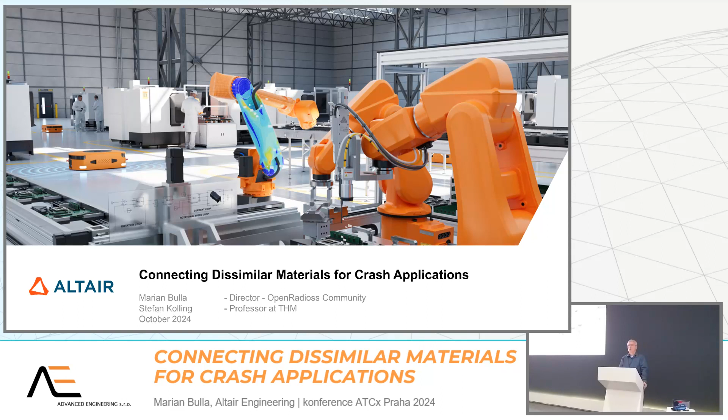We will touch again materials, because dissimilar materials means different materials, not only steel, failure criteria, connection elements, connection modeling techniques, reality versus virtual world, which means simulation in Radioss and OpenRadioss, contact interfaces and so on, failure of contact interfaces, cohesive zone elements, so all this beautiful nonlinear stuff, which you can imagine, we will talk a little bit about.

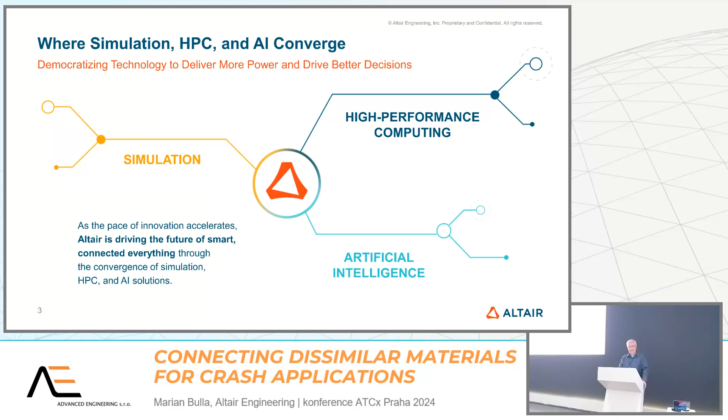So our vision at Altair is computational intelligence will drive innovation for a more connected, safe and sustainable future. So this is what we want to now democratize, and what we did with HyperMesh, which you saw before, but also with Radioss, OptiStruct, implicit solvers, and explicit. And even with Radioss, you have the commercial version as well as the open sourced version, which you can use for free without any license fees. You can even see in the source code how Radioss is coded. I will come to these points in a few minutes.

Okay, let's get started. First, a little bit theory, the implicit part, which is, for example, OptiStruct, Nastran, and so on. All the implicit solvers are working in this way, and this is the heart of it, where the stiffness matrix times the deformation is equal to the external forces. Once you reach this equilibrium, you are fine, and you will have your global solution. For implicit, if you are lucky in one step, you will get the convergence, equilibrium, everything is global, solution, perfect.

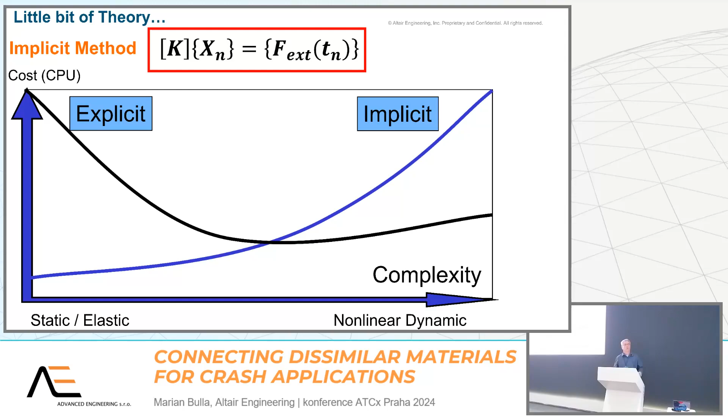Anyway, the world today is not black and white like this, so it's kind of this. The implicit solutions you can use here. If you are in static, elastic load cases, implicit is perfect. Plasticity, slightly, buckling, even less. If the velocity and dynamics are increasing, it will become more and more difficult to use the implicit solvers. We're switching to explicit solutions.

For sure, times are changing and solvers are evolving. So now it's not black and white anymore. We have an intersection area where it is not so easy to distinguish what kind of solution should be used. Therefore, both solvers are now evolving. The implicit solver like OptiStruct is getting more and more features of the explicit solver. So you can even now do drop tests with OptiStruct. Whereas explicit is also going to this region where it is usually very costly to do static simulations for an explicit solver.

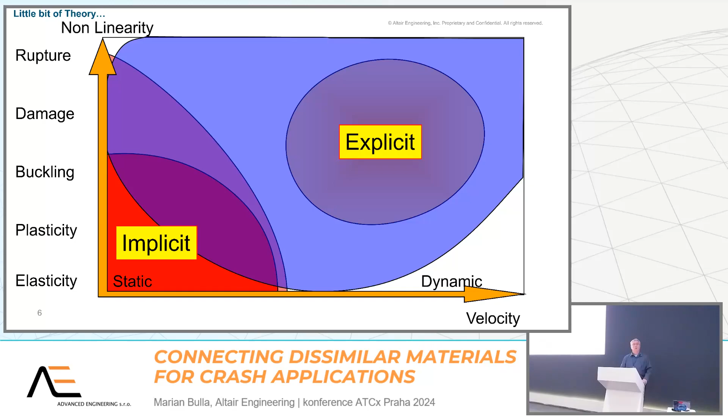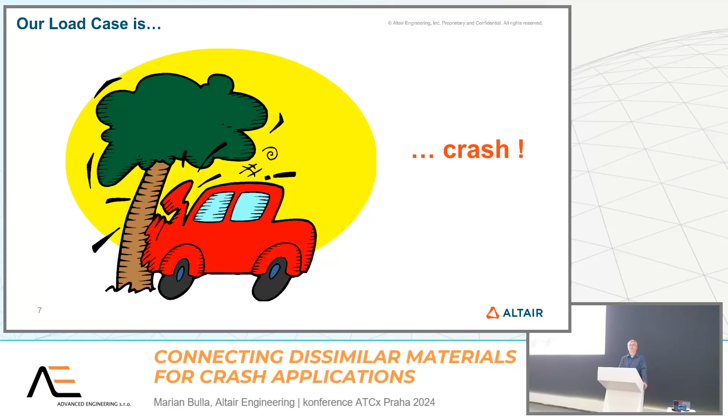Okay, let's go now to our use case, why I'm here today. My use case is typically this, crash. And this is where I would like to spend a few words, because it's quite challenging topics which I want to address today.

Okay, let's go back to the theory. What is this equation which we are playing with now? This is called the equation of motion, where we have mass times acceleration gives a force, damping times velocity is a force, stiffness times deformation is a force, equal to external forces which are time dependent. They can also be zero. If they are zero, you have free fall, for example.

So what is now the definition of an explicit solver? So this is our guy. We start from time zero and we are looping over external forces, internal forces which are based on the material routines, for example, strain rates go to stress rates and assemble to stresses and so on, continuum equations, next time step. So this is a loop in time.

What is the final criteria for this? Where does it end? There is none. Therefore it's called explicit. You have to define explicitly the termination time. So here the solver does not contain any final criterion. You define it explicitly, after 100 milliseconds for example. So the solver stops, wherever, independent if the problem is already solved or not, the solver stops. For sure you can do restart and continue and so on, details.

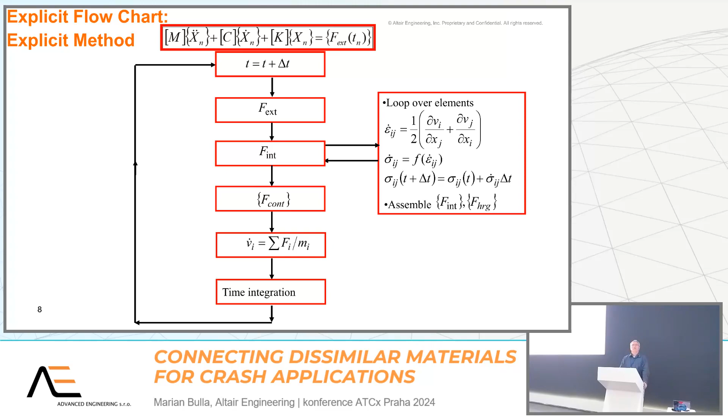And this is again the equation of motion, which we are solving with the explicit solutions. And this is now the reason why we developed in the past Radioss. I will go to it in a few seconds. And from Radioss, 2 years ago we split out Open Radioss, which is now the development version for Radioss. So everyone can take now the source code, the entire source code of Radioss on GitHub, compile it, or you can even download a pre-compiled version and use it.

No limitations. There are some differences. For example, encryption is not included in Open Radioss. Why not? Because it doesn't make sense. If you have open source software and the material models require the values, you can go inside and add a small print and you will get the value.

So we have to protect the existing encrypted models like dummies, barriers, or many companies are still using their encrypted material cards, because as you saw in the previous talks, creating a good validated material card is very, very costly, time intensive, and you need a lot of tests. I will come to this point as well later on. And therefore, if you deal with your whatever partners or other companies, you want to protect your IP, or the others want to protect their IP. Therefore they have to use the commercial version of Radioss, where it is possible.

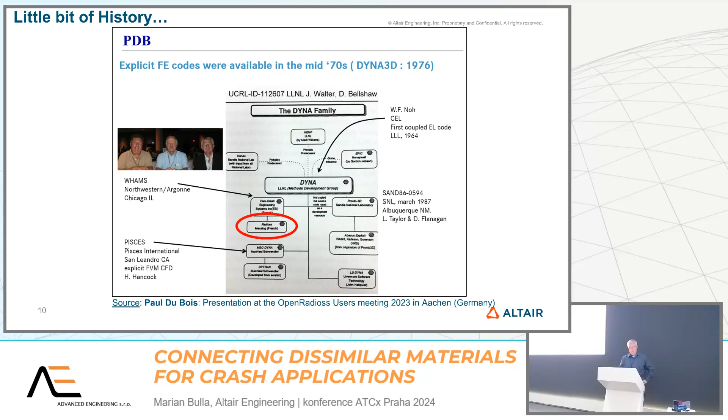Okay, these are the history. Later on in the history, in 1991, the first car-to-car full vehicle crash was done by Opel AG using Radioss as well. So this is an industrial proven solver, which is created for the industry, and again released 2 years ago also as open source. So it is not an academic solver, it's an industrial solver.

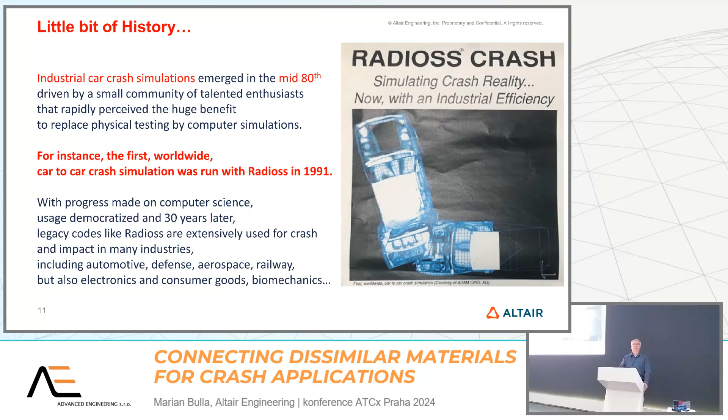Okay, now let's go into some projects which I can show you. For example, the Light E-Body project, which was funded by the German administrative bodies, and some companies were involved here, like Ford, like Volkswagen, like other companies who are producing materials, like ThyssenKrupp from steel, or Dow, or Hydro Aluminium. So different materials. And these guys said, okay, we want to create a virtual car where all our materials will be used. So they started with just pure geometry, did some optimization with OptiStruct, and then started to create an FE model, body in white, and then later on a full vehicle, which is synthetic vehicle. It was kind of a merge of a VW car and a Ford.

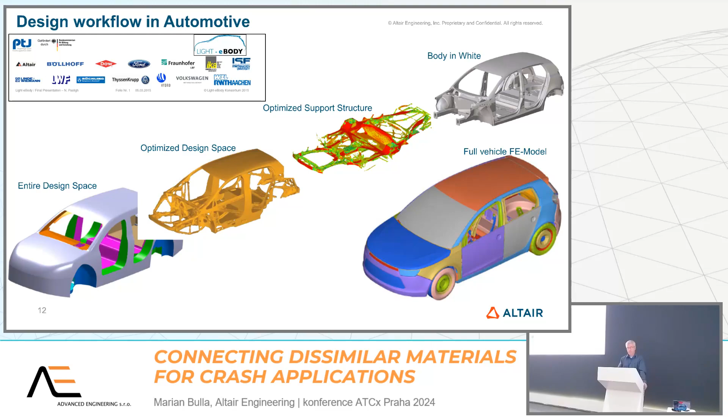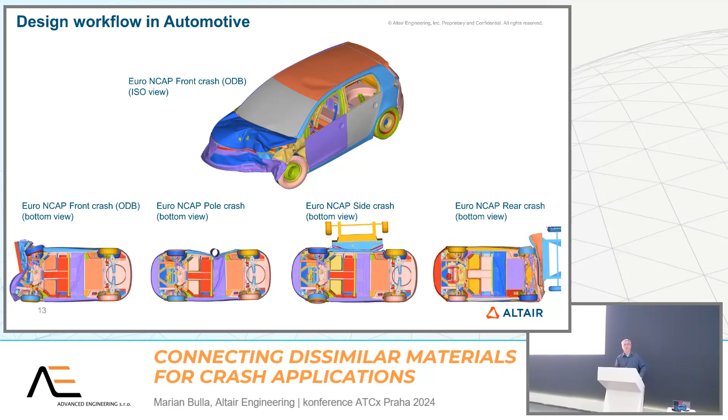So you cannot see it here, but if you do the silhouette, you will see this is kind of a Volkswagen Golf and Ford Focus, which is kind of a merge and a hybrid vehicle. And then for sure we did some tests, Euro NCAP front crash, side crash. So you see the individual crash cases below: the offset deformable barrier, pole crash, moving barrier, so deformable side crash and rear crash, and some other scenarios which we investigated here.

And the main point what we used then was how to bring all these different materials together, because it's a multi-material mix which we have here: steel, aluminum, polymers, composites. So most of these materials are used in the typical cars today.

For steels, we have different grades: mild steel, hard, high-strength steel, ultra-high-strength steel, and so on. Composites were used also in different areas. Aluminum alloys, different ones. How to connect these different materials, because they are used in these areas here, where you can see the individual material mix. And then some parts are made of polymers, plastics, aluminum, composite, and so on.

How to connect, for example, steel with aluminum. These metals don't like each other, so you cannot weld them. So you have to use different approaches. Or whatever, composites and metals, they even also don't like each other.

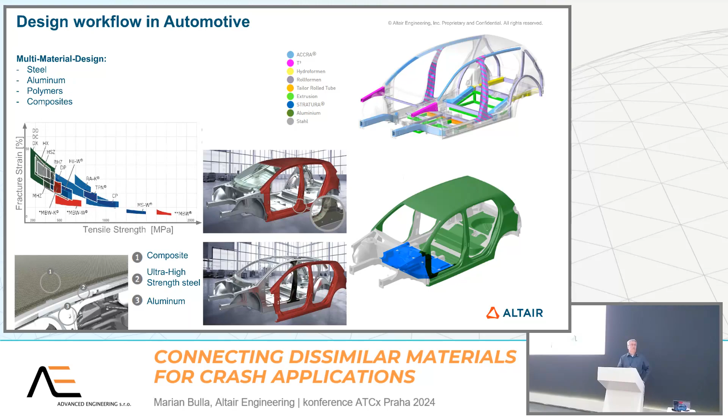And here, for example, the B-pillar, we have different materials: aluminum, steel, composite. How to connect these materials? This was really a big question. And from the real world, we know joining techniques like point joining, spot welding, screws, clinching, self-piercing rivets, and so on. For lines, laser welding, bonding, and for area, also structural adhesives, and so on.

So here, spot welds, for example, from reality. Laser welding lines. So again, self-piercing rivets where you can connect dissimilar materials.

And all these connection technologies were used in this project. So basically very often also bonding using adhesives, welding, for these kind of connections. For dissimilar materials, it's working pretty well, depends on the area. So many different techniques were used here within this project. This is what reality shows, what is used in reality.

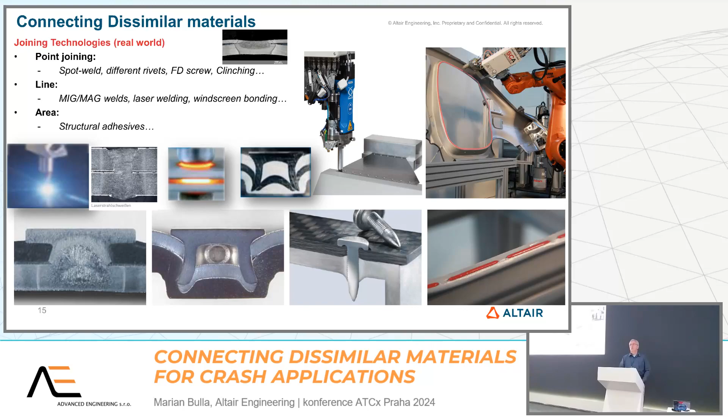Okay, now let's go to the virtual world. What can be used now in FE simulations? So from the past, joining technologies in the past use, for example, rigid body, which can connect whatever it is with an infinite stiff connection method, which is just an equation.

Much better: so you use, for example, here a bolt, which has one spring. You can even add pretension forces for bolts and then connect to different surfaces and so on, which can be completely rigid or deformable, whatever.

So now, in the past, where the mesh size was 10 millimeters or larger, which means 10 or 20 years ago when I started using these things, for this large mesh it's fully okay to add two nodes, connect them with tied contact interfaces, and define a spring here which represents a spot weld or whatever. Fully okay for large mesh elements. Because the force will be distributed on a large surface, everything is fine.

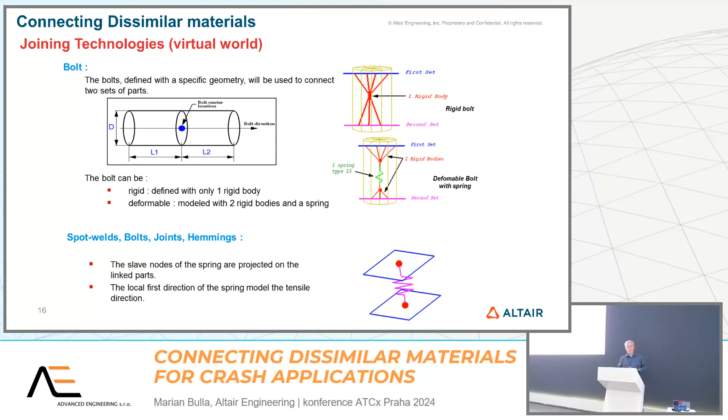Nowadays, today, the world is changing and our FE models are also changing. Again, in the past, what was also used: common nodes for connecting elements, rigid bodies, beams, mesh independent, and now we are going to use also solid elements. Why? Because the mesh size is getting smaller. And if you have a very small mesh, let's imagine 1 millimeter square, and you apply a force to it, force divided by the area is the stress, and the stress is increasing if you shrink your mesh.

Therefore, this method is for typical applications today not useful anymore because the mesh size is so small. Smaller than 5 millimeters, I would only recommend switching to distribute the force on a larger area with a solid approach.

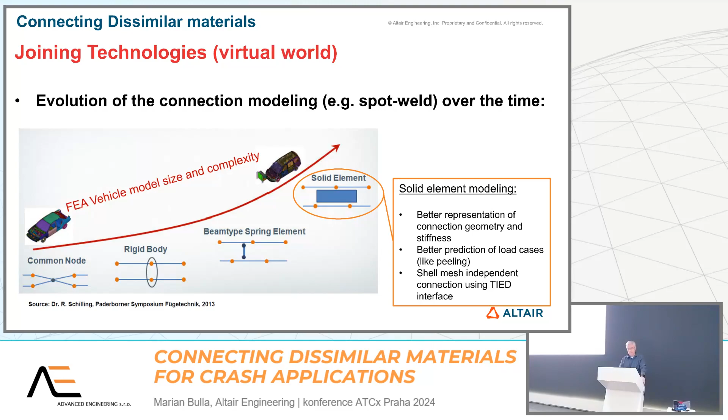So, how can it be done? For example, in HyperMesh, or previously with HyperCrash or other tools, you create one solid which represents your connection method. It can be an adhesive, it can be a spot weld, it can be whatever, self-piercing rivet, and so on. Tie the nodes on one side of the material and the other side to the second material. Everything is fine.

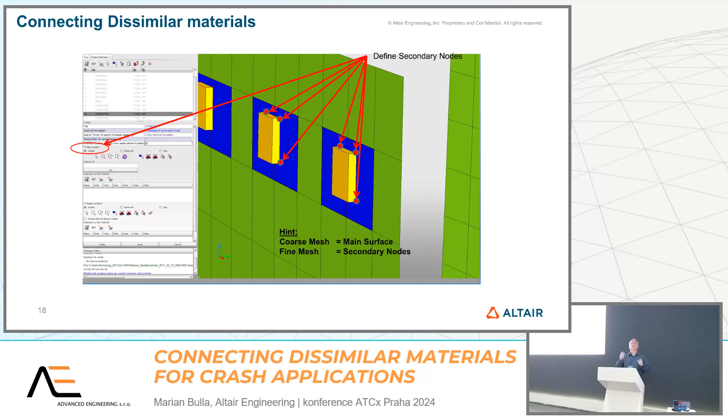This is the state of the art, creating spot welds, for example, today, which are represented by one solid. If the mesh size is shrinking further, which is the case, then one solid is again not valid anymore. We have to split the solid into finer solids. So therefore, we are going to split. This was state of the art maybe 10 years ago; this was maybe 5 years ago.

Today, we are going to this size of mesh, representing also the connection-influenced zone, which can be the heat-influenced zone in case of spot welds. It can be whatever, some other connection methods like rivets, where you just shoot a hole through it and you have these initial cracks, which can act as crack initiation areas and so on, where you reduce maybe the stiffness here or add some damage to this area. And today we are in this phase, and this is how it was done in this project as well.

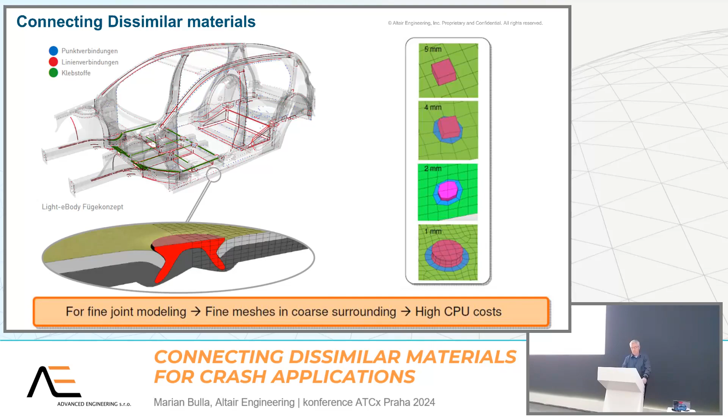And this will be in the near future, we will go with this mesh size. The computational power is increasing. You saw some words today morning about HPC. This will be in near future, so I'm sure. Because today we are at this level, tomorrow, in the near future, we will do this like that for point connections.

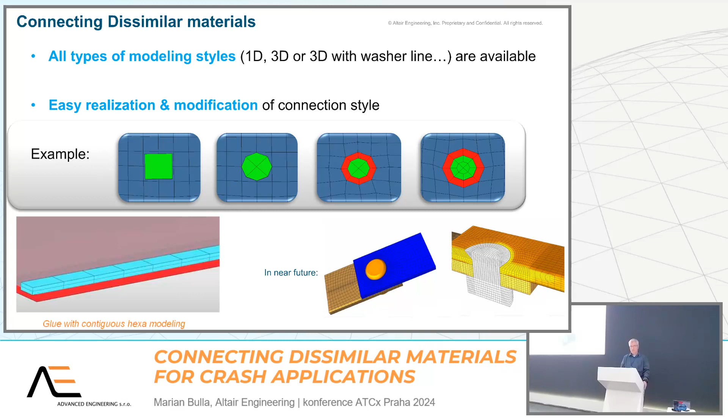So now let's go for adhesives, because we have to deal also with testing. First, getting the information by normal tests, normal loaded, shear loaded, and also peel. For adhesive, the peeling is very important, because here the areas are rotating, and we have this peel effect like you would peel a banana. So this is very critical also for adhesives. So how to test it and how to model it.

So we did it also with Dow Betamate, and connected also mesh independent this peeling layer, adhesive layer, which is here, was connected to both surfaces, mesh independent, using a tied contact interface, which is very nice and works pretty fine. If you go and bond adhesive between two metals, plain metals, without any coating, without any paint on it, and so on, which is for testing the adhesive, it's perfect.

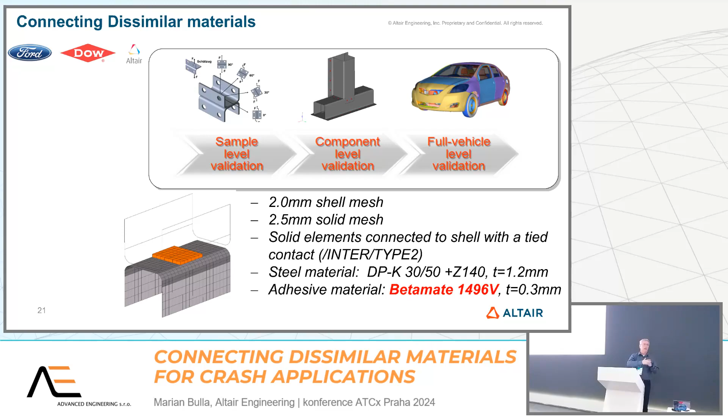For reality, we will see. How to now deal and model this, all these materials and failure criteria for real applications, because in reality you do not have naked steel. You have always KTL surface or whatever paint or whatever coating on your metal, then you apply adhesive and so on and so on. So in reality we have this kind of situation.

So here we have material 1, here we have material 2, which is a different kind of material. This can be, for example, a metal, this can be a polymer or composite, whatever. Or steel and aluminium, same issue. And then we have coatings, and we have the adhesive. And then we load the structure in this way.

This can lead to different fracture patterns. Cohesive failure, for example, which is here. Adhesive failure, which is here. Coating failure, which can occur here, and the material failure which can occur here. So we have to model all these individual materials and failure criteria and to test them separately to have a validated model.

So this is normed in the standard ISO 10365, so you can read it, how it is defined. And we did these tests.

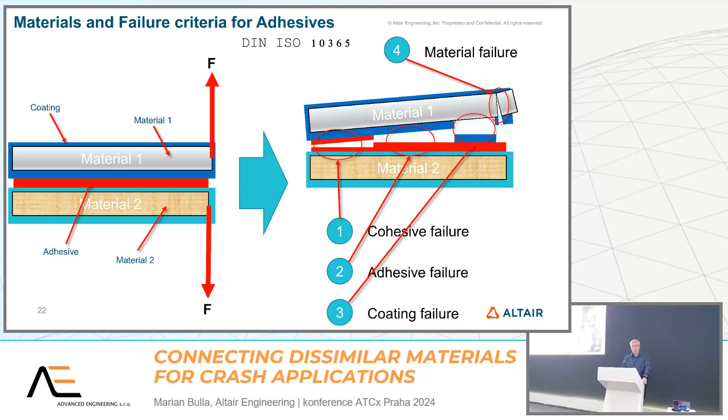And then we also did some material tests, which were quite dynamically loaded structures. For example, here, cast iron in this case, different velocities, different shaped test specimen for getting more information about the failure mode.

So this tensile dog bone test is not sufficient anymore. We need more information on bulky materials using the cylindrical tests for shear tests, plane strain, compression tests, biaxial tension test with this punch test, and so on and so on. Sharp bending tests to determine and to have more information about the fracture models.

For the material cards, just different velocities from a tensile test were used here, so strain rate dependence on metals in this case was obtained. For polymers, it's even more valid because polymers are definitely very highly affected by viscosity, which means different loading velocity. For metals, it depends. You cannot see it on the metal, you have to test it. Some metals are highly strain rate affected, some are not, or do not show it too much. Which one is which one? I don't know. It must be tested.

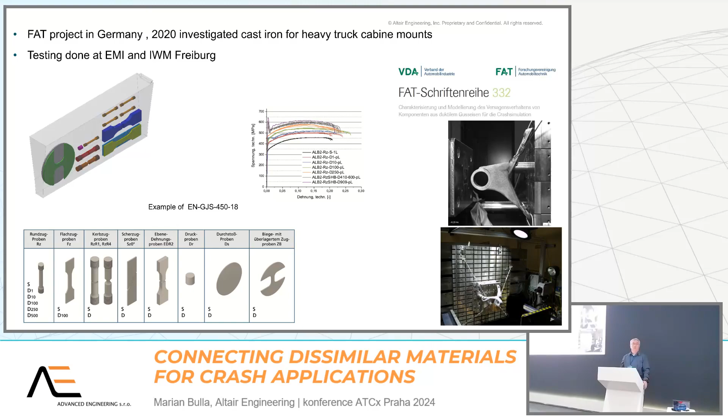Okay, for getting the material card, you do this tensile test, which is the first approach which you do for fracture. In the past, this beautiful fracture limit was obtained or put in the material card here, Radioss or LS-DYNA or PAM-CRASH, all the same, and people were happy. So maximum plastic strain added to the material card, and it failed once this plastic strain limit was reached. Very nice, beautiful, simple to use. You need one test and you input your value directly from the test. But there is of course also a drawback.

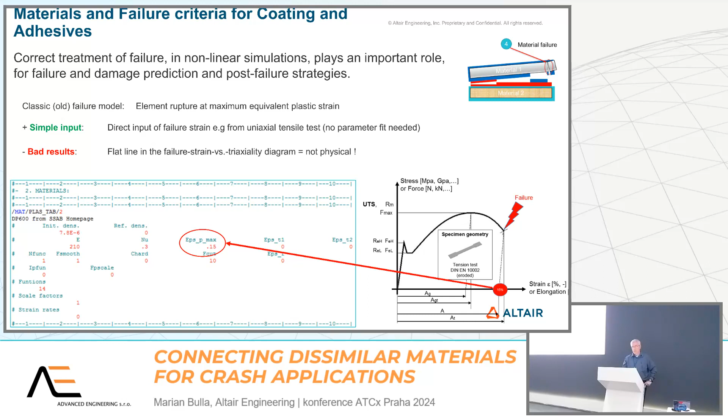Flat line in the failure strain versus triaxiality diagram, which means it's not physical. What does this mean? Here, the maximum plastic failure strain is this one. Flat line, if you compare over triaxiality, which means the ratio between hydrostatic stress and von Mises stress, which helps you distinguish the load case: compression, shear, tension, because the materials behave differently if you load them, for example, in compression. Usually, the materials can go with a higher strain until they fail, whereas in tension they are critical. Shear can be somewhere in between, and so on.

So the reality looks something like this. So what is obtained from reality? Material behavior to fracture depends on how it is loaded. For compression, usually not so critical as for tension. Shear can be here, somewhere in between. Most critical part is usually the plane strain load case, and so on.

You can use for this, for example, some analytic models which exist, like the Johnson-Cook failure criteria, which gives you this kind of shaped curve, which is better than the flat line. It distinguishes between failure in compression versus failure in tension, which is good.

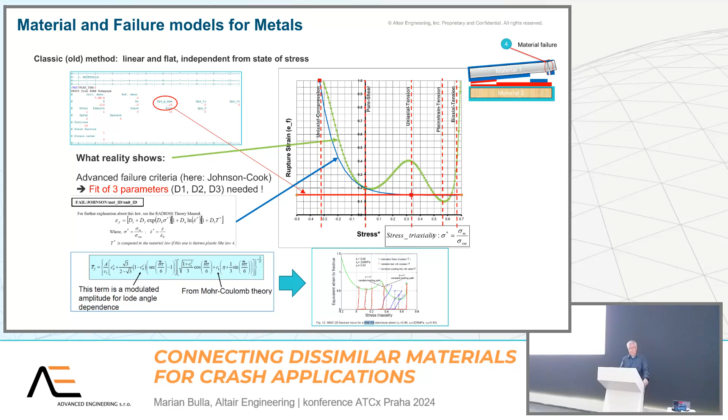For sure, we developed also a new failure model, which is BiQuad, which is even simpler, 2 parabolic equations with an intersection point in uniaxial tension, which gives you a much easier way to use it. Just enter here the failure strain for fracture in case of compression. Here you add the failure strain for shear. Here from the beautiful tensile dog bone test, for example.

Here is plane strain, and here is biaxial failure, for which you can use this kind of test, or a punch test, which means a sphere through a plate, whatever. So there are different geometries or test methods here. Just ask your test lab, and then you can go for validation.

So this is quite user-friendly, even if you do not have, because here it requires 5 different tests with different geometries. Who is doing that? I would say almost no one. If you are lucky, you can do the tensile test. So then you are already lucky. Which means we had to make it simpler.

And we simplified it, so you can now forget the compression test, shear test, plane strain and biaxial. Use only the most used tensile test. Keep these values at 0. And set a material flag here, which provides you an internal database for some material families, where we obtained the values from different research projects, and they act already very, very well. So you don't need to do these kinds of very enhanced tests.

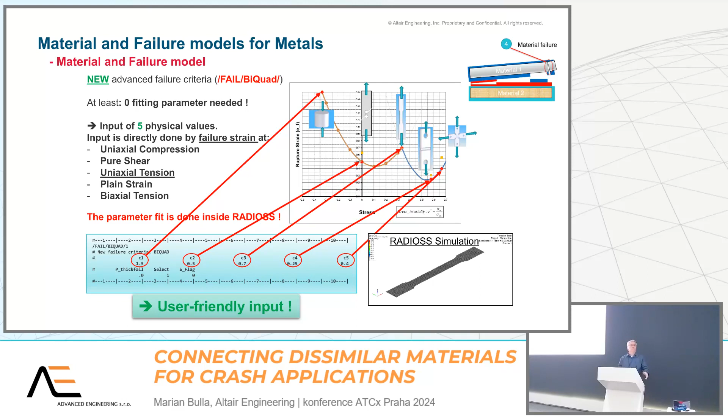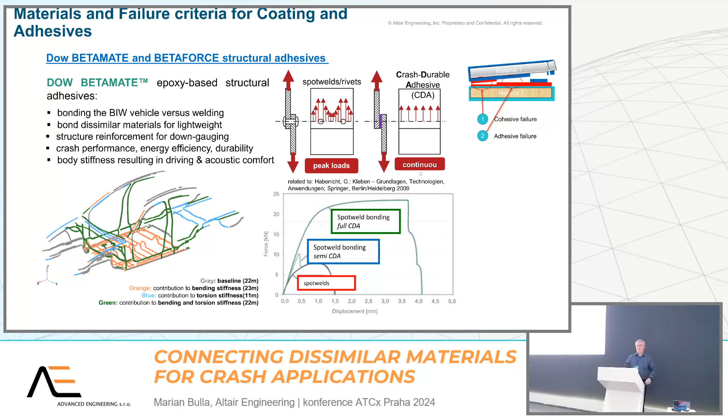So let's go to the next one, cohesive adhesive failure. Here we worked very closely with Dow, which is now DuPont. They were acquired by DuPont or merged. And we used Betamate. We tested this adhesive in different ways, how it behaves, and then validated our models. First of all, modeling with cohesive zone elements.

The adhesive layer can be very, very thin and small. You can now also model it with whatever height you want, and apply a value for the true thickness. Why? Because you model this adhesive with a solid element, but it is not a continuum mechanical solid element. It's a trick. It's just a cohesive zone element, which can have a volume of 0. No issues. It has only 4 integration points in the mid-plane, which act like 4 springs. A very simple approach, which exists in any solver, in LS-DYNA, PAM-CRASH, Abaqus, Radioss, of course.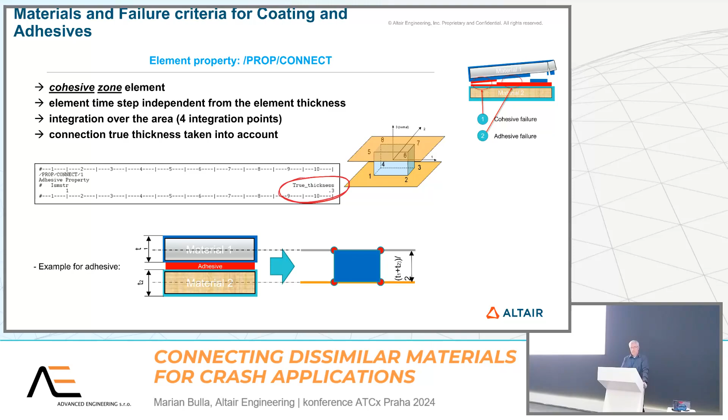How to deal now with the fracture criteria? We developed an equation to deal with fracture in different load scenarios, and the asymmetry value, which helps to distinguish the peeling force. With rotation of one surface against the other surface, you see a reduction of the normal failure force. And this is what we figured out in this research project.

And now you can use this kind of test for peeling and fine-tune these values here. So this allows you now to catch the peeling effect in addition to failure in normal direction and in pure shear direction.

So this is the influence of beta, the exponent. You can go to this kind of shape from more or less decoupled to fully coupled. So you can fine-tune it by different tests.

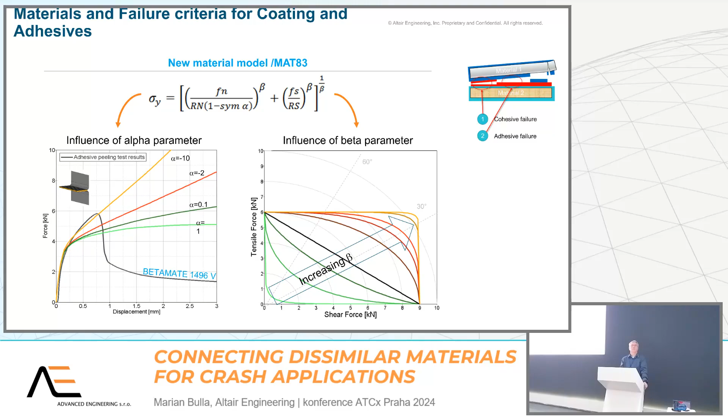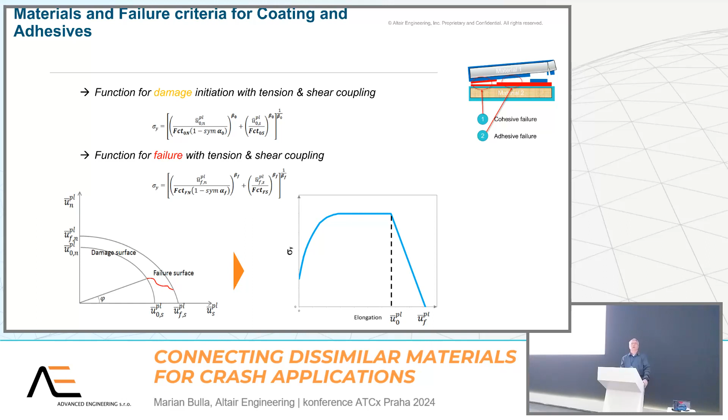As well as the fracture, the failure is described with the same equation but different values here to define the failure surface. And between initiation of failure and full fracture, you have softening, which you can also define until the full terminal failure for these adhesives.

For sure, you have to do some tests, for example these KS2 tests, where you see here in red the experiments and the blue line is the validation for all these tests, and we are in pretty good agreement with the tests.

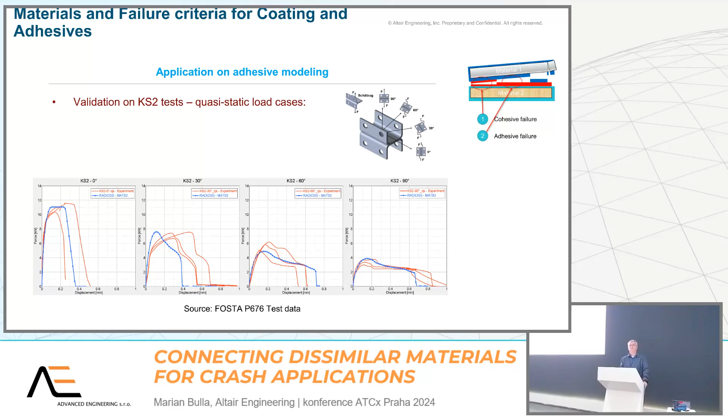And now go for validation of a more complex structure, this T-joint, which we also validated in a pretty nice way. And this picture shows the reality, the real part, where the adhesive under this load case is failing in this area.

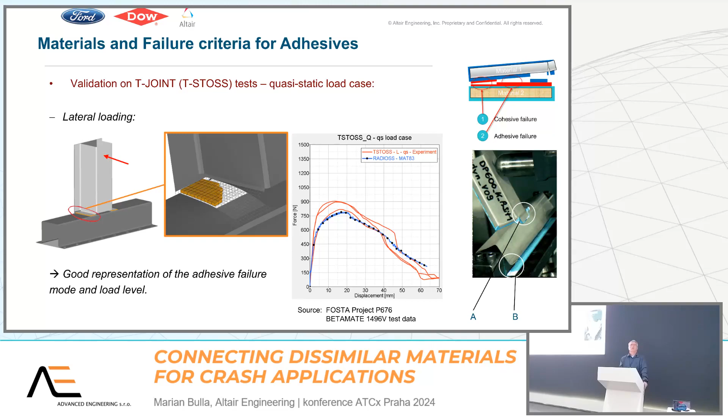But again, coming back, what we are using in automotive is not naked steel. It's covered by KTL surface, paint, or whatever. So we have to consider this as well, because it's there.

And what we see here are pictures from reality, where you see failure of the coating in this area, where it is torn apart from the metal below once we have loaded it very highly. This pink stuff here is the adhesive. Here we have the paint, the coating. And here you have the naked metal. So we see coating failure in reality, in real tests.

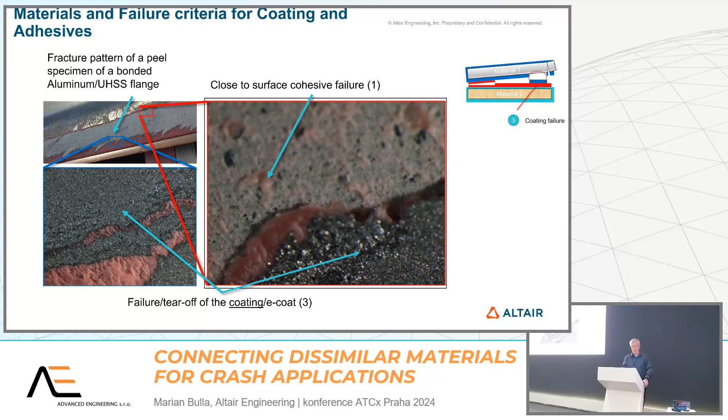How to model it? The thickness of the coating is very, very thin, so even with today's methods we cannot model it with elements. So we can use a tied contact interface with definition of failure in normal direction and shear direction. You add a tied interface between two layers of elements which have different meshes, and in between, you model your coating with an interface.

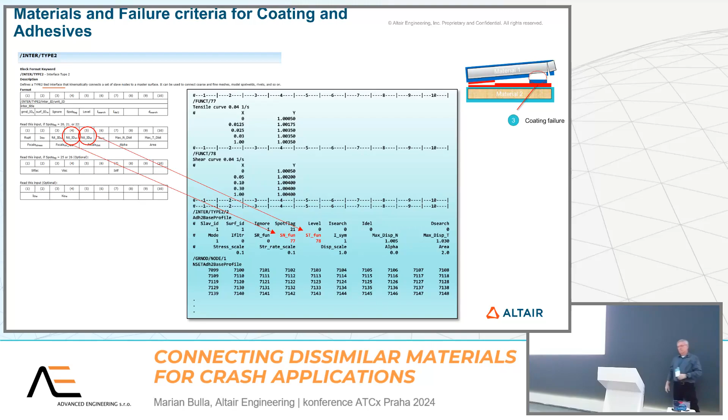So once you do that, you have the possibility to model material and fracture for the base material, which must not be metal, it could be polymer, the adhesive, and between adhesive and your material, the coating by contact interfaces. And now let's do the validations.

First, fracture is applied only in the metal, not in adhesive nor in coating. Once we load, this is the virtual test, the FE simulation done here with Radioss, and we see only fracture in the base material. Why? Because I applied it only for the metallic part, perfect bonding, which is not the reality, but just for tests.

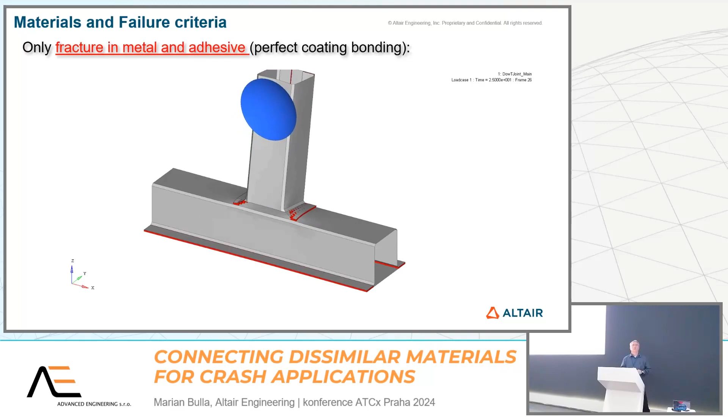Now I apply failure in addition to the metal also for the adhesive. And I see here my elements, which represent the cohesive zone elements for the adhesive, are disappearing, which is much closer to reality. But the painting, the coating, is still perfect. And now let's apply fracture in the coating as well.

And now I can see some elements are still not broken for the adhesive, which means the bonding has failed. The tied contact interface failed, and the adhesive is still gluing on one part, on this part or here, which means the failure occurred in the paint.

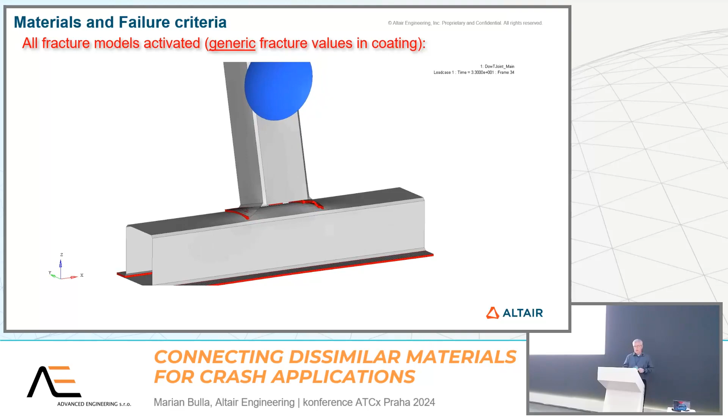So this leads me to the end, more or less. Now, as a sneak preview for Michele's presentation: these are for engineers, simulation and post-processing methods. Management prefers something like this, more sophisticated rendered pictures. These are photorealistic renderings from FE simulations, which you can also do with HyperView, but Michele will show more features on that, hopefully. Your management will appreciate that.

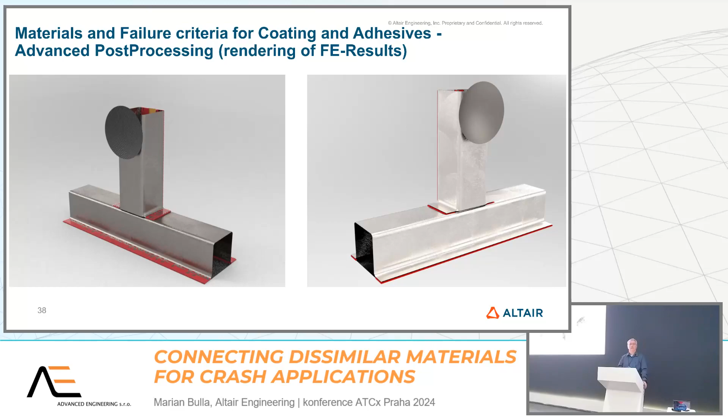Okay, coming to the end, summary and conclusion. Radioss offers many predictive material and failure models. We increased the speed of development even further by open sourcing it. So now universities, like what you saw this morning from Professor Collins and others, have started developing and enhancing it, because they have the entire source code without limitations, which you can also use.

Damage initialization and visualization possibilities are already implemented because it's an industrial solver. Advanced interfaces for modeling coating surfaces with failure, in addition to classic penalty contact interfaces, are available, and so on. Anyway, there's still a lot of need for further investigations of the structural behavior of coated metallic structures using adhesives, and also for new materials and new methods for modeling failure and all the other nonlinear behaviors.

So I would like to invite you to participate, use your brain, and help us develop this solver further. You can use it for free as you want.